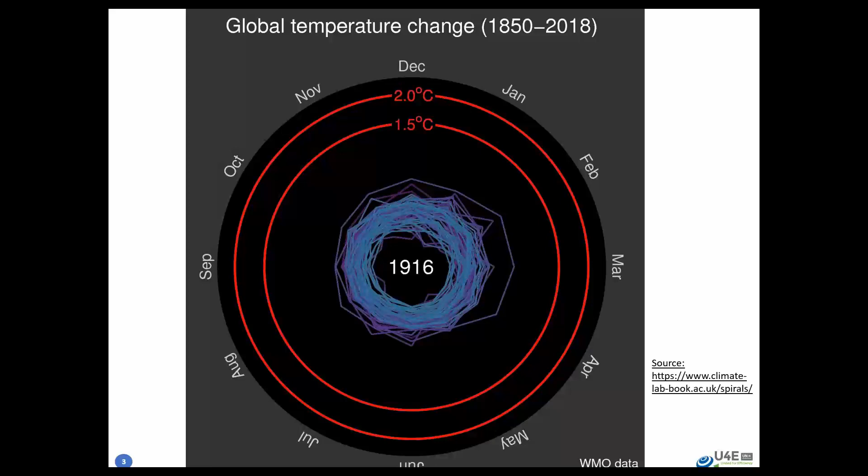So the context, as most folks are aware, is that we are living in a warming world. And not only is the world warming, but it's warming at an accelerating rate. The Earth has warmed approximately 1 degree Celsius since pre-industrial times. If warming continues at the present pace, global average temperatures could potentially reach 1.5 C above pre-industrial as soon as 2030, and even earlier if we take into account some of the accelerating warming, for example in the Arctic regions. This is why it's very important to identify where we have mitigation strategies that can be fast acting and where we have the tools to make them real.

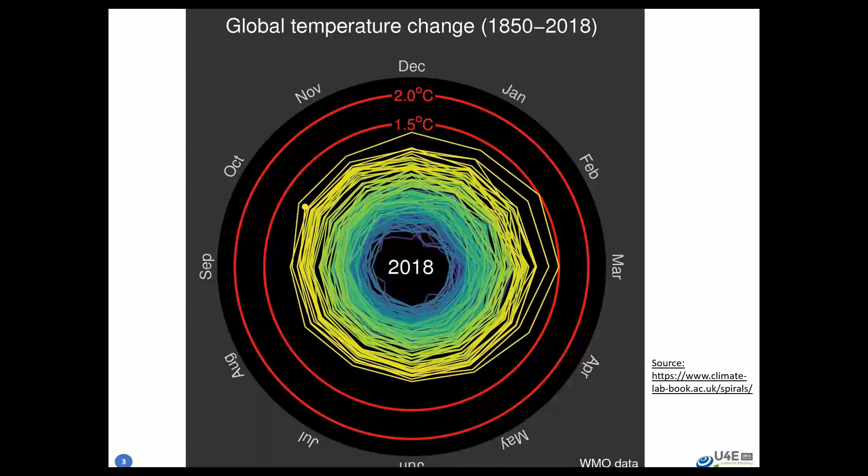Next slide, please. The good news is that we have the Montreal Protocol on substances that deplete the ozone layer, which since its agreement in '87 has avoided approximately as much radiative forcing to date as current forcing from CO2 — about 1.7 watts per meter squared.

Now, the Kigali Amendment, which was agreed in 2016 and went into effect in January of 2019, is estimated to avoid approximately 0.4 Celsius of warming by the 21st century. The Scientific Assessment Panel of the Montreal Protocol found that if we were also to improve the energy efficiency of cooling equipment, we could potentially double the climate emissions benefits from the HFC phase down in the near term.

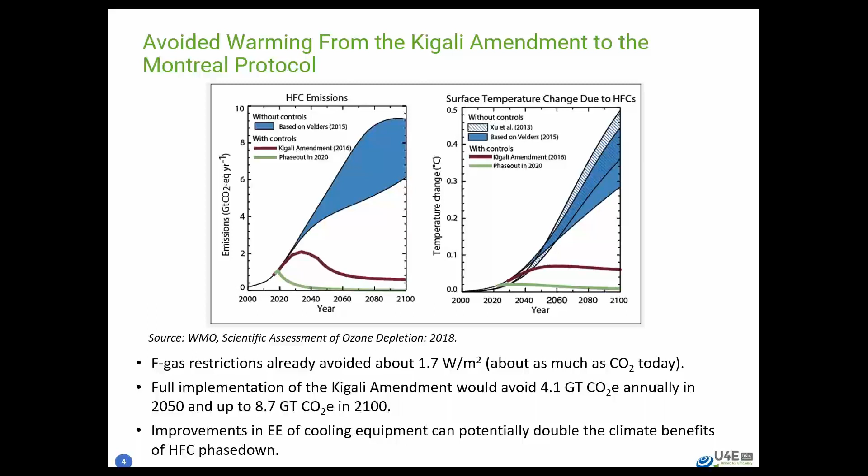An analysis recently completed by Lawrence Berkeley National Laboratory, for example, looking just at energy-related emissions, found that if we were to essentially replace stationary air conditioning and refrigeration with best available technologies today, we could avoid cumulative emissions of 150 to 280 gigatons of CO2 by 2060. So this is one of the largest mitigation sectors available to us. Next slide, please.

Just a quick word on the Kigali Cooling Efficiency Program. It's a philanthropic collaboration focused on promoting energy efficiency of cooling to increase and accelerate the climate and development benefits alongside the Kigali Amendment and the Montreal Protocol refrigerant transitions. The focus is on mitigation, but we also are concerned about health and equity through our access to cooling window.

And I encourage everyone to look up the Sustainable Energy for All cooling outlook that was just released earlier this month. So we built partnerships across the Montreal Protocol and energy efficiency spaces, including work with the Montreal Protocol institutions, and the work with UN Environment and U4E has been very important as we look to provide tools and knowledge to help with strengthening energy efficiency policies, standards, and programs.

Next slide, please. One of the things that has been very revealing as we've looked at the cooling sector, in particular the largest in terms of units, the Minisplit Market for air conditioners, is that there is a strong relationship between policies for efficiency and not only the level of efficiency of equipment, but also the refrigerants that are being used. So very bluntly, the absence of good efficiency policies is affecting markets and consumers directly.

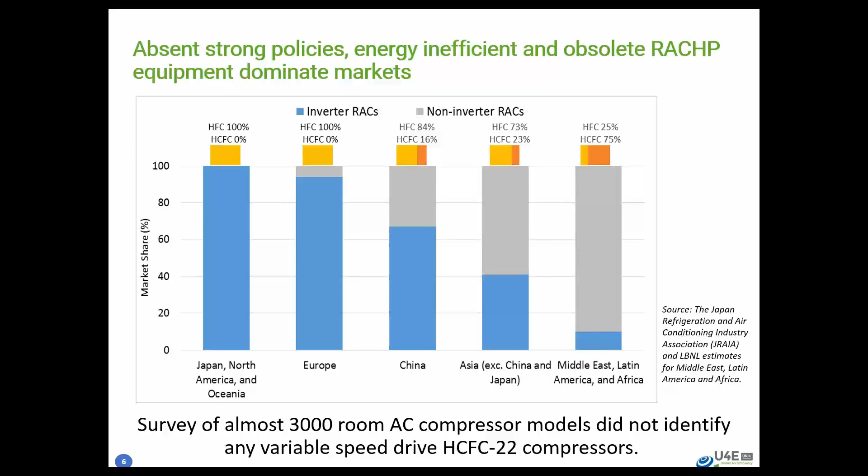One of the great aspects of the model regulations is that, in addition to minimum standards, they also have a high efficiency and middle tier to help countries see a trajectory of improvement for efficiency. Efficiency does not stand still. Innovation is constantly occurring, and we want to encourage, through complementary programs, adoption of these more efficient technologies to bring these products to market. You can see the increase in scale of savings with the high ambition scenario.

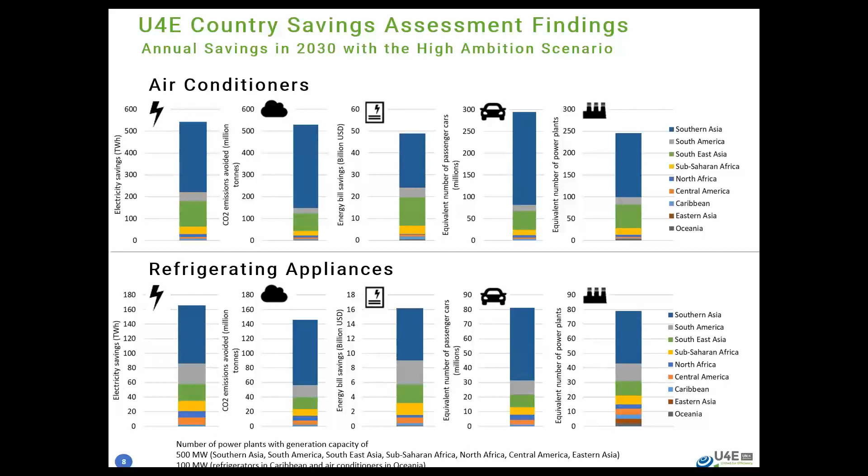So what I'd like to dive into again is a bit of how we got here. Why did we develop these model regulation guidelines in the first place? Where I'd like to start is that we had the honor and the privilege to co-host training workshops with essentially all of the world's developing and emerging economies over a 2-year period.

In 2018, and again in 2019, we held what we called a twinning workshop, a series of twinning workshops in different regions around the world. These brought together senior energy efficiency officials and ozone officers, people that work in environment ministries typically, and they are charged with compliance with the Montreal Protocol.

So for folks that aren't aware, as a bit more background, part of what we're trying to do here is bring together two different topics that are typically not addressed jointly. Energy efficiency is a big opportunity from a climate standpoint and economic development standpoint, and a lot of the energy ministry officials are familiar with setting energy policies and having energy programs. On the other hand, in the environment ministry, they're dealing with the refrigerant gases that are in air conditioners and refrigerators, and they are often working on these things without having the support or the engagement of energy officials.

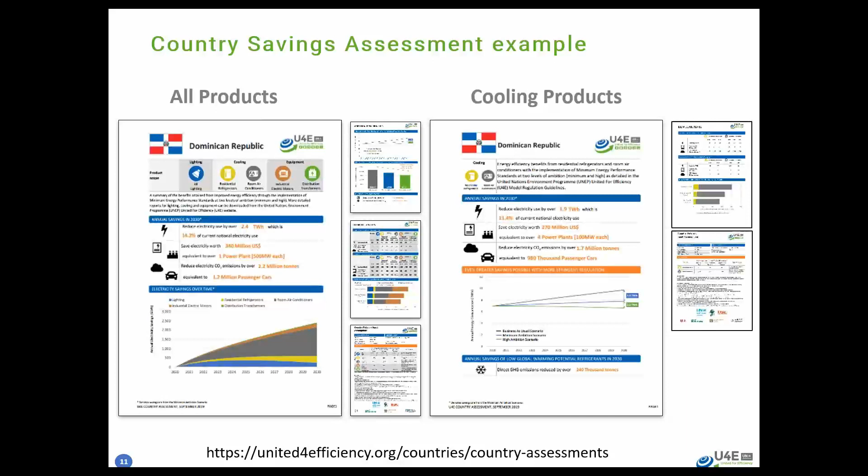And if you have questions or feedback on the analysis we've done, you can reach out to us and let us know. So now let's dive in.

For those who don't have much background—this may be familiar to attendees of the twinning workshops—this is a very simple overview of minimum energy performance standards. Let's say in a typical unregulated market, with no market monitoring system, there's a variety of refrigerating appliances available for sale today. It's clear that some are going to be worse performing, with worse energy efficiency than other models, but it's often tough for consumers to differentiate.

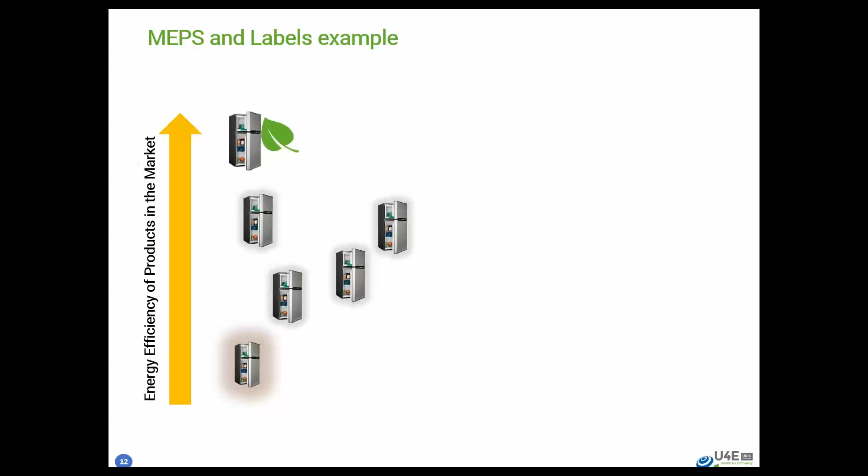Consumers might not know that buying a really inefficient product is going to cost them a lot of money on their utility bills. So one of the targets we're trying to make easier is to set a performance floor, a minimum energy performance standard, that would ban the importation of used products. It would also ban inefficient products from entering the market, and if you choose to regulate refrigerant gases simultaneously, it would also ban high global warming potential refrigerants.

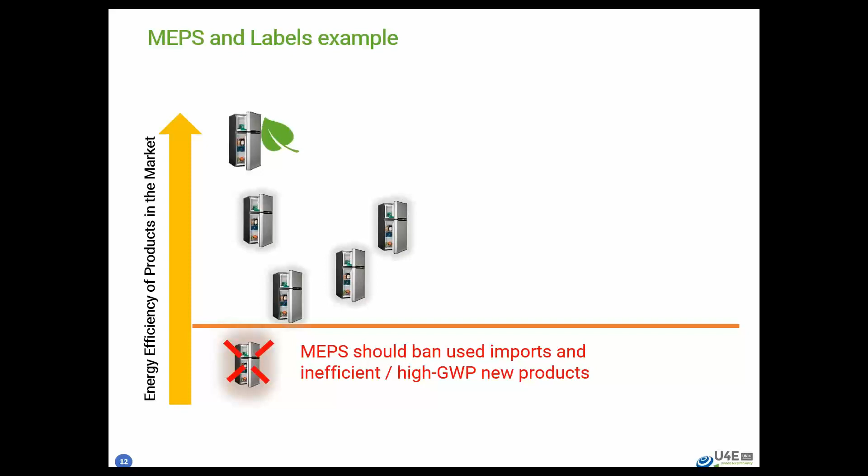For consumers to further understand the differences and performance between products, it's important to have labeling. This is a generic example—you can use stars, letters, various approaches to labeling—but it shows that governments will often try to incentivize the very best products, those A-level or top star products entering the market. Here we've got a little green leaf next to the best product, so the consumer can get a better sense of what's available for sale.

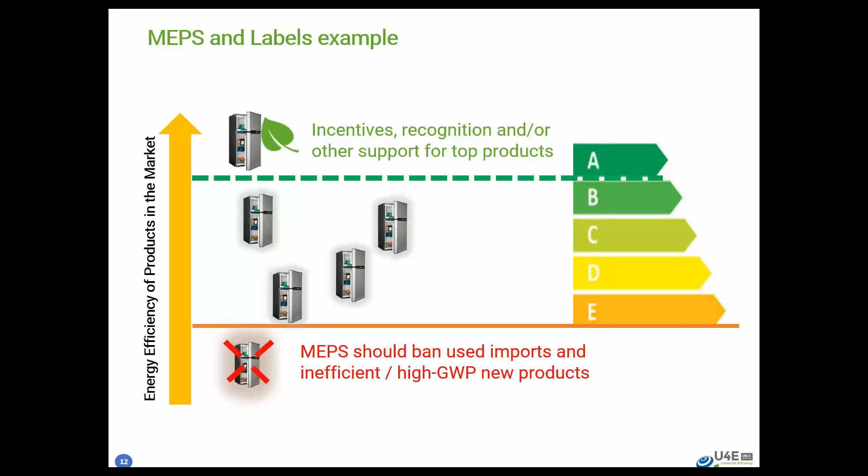So in a nutshell, this is MEPS and labeling. We're drawing the model regulation guidelines from some of the world's best examples. We didn't just sit three or four of us in a room and try to draft these things—we did a mapping to get a good sense of where policies are today around the world. We have a spreadsheet tracking all the policies we're aware of on refrigerating appliances and air conditioners, and we wanted to see where major markets are headed and where the technology is trending.

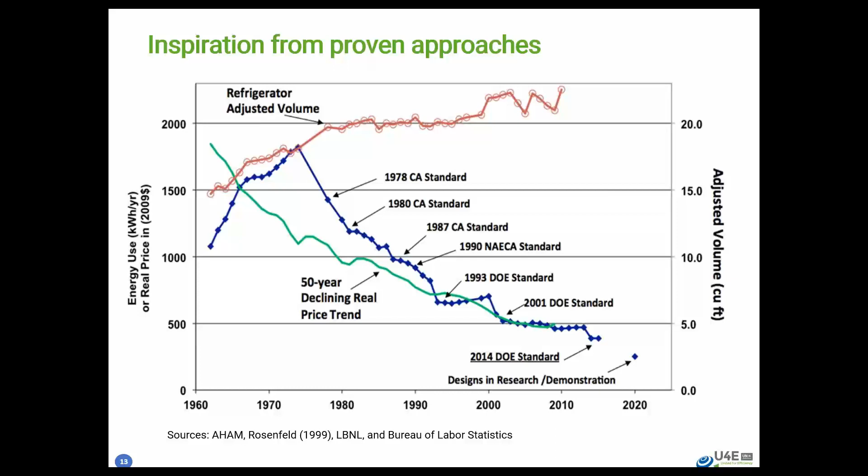So a country might say, well, we're banning the importation of used products, and yet they're finding over and over that used products are flooding into the marketplace. So enforcement's a challenge. Another big issue is that you can have neighboring countries that have completely different policies, so they're asking a manufacturer to do one type of test while the neighboring market requests a different type of test, and the cost of compliance is driven up.

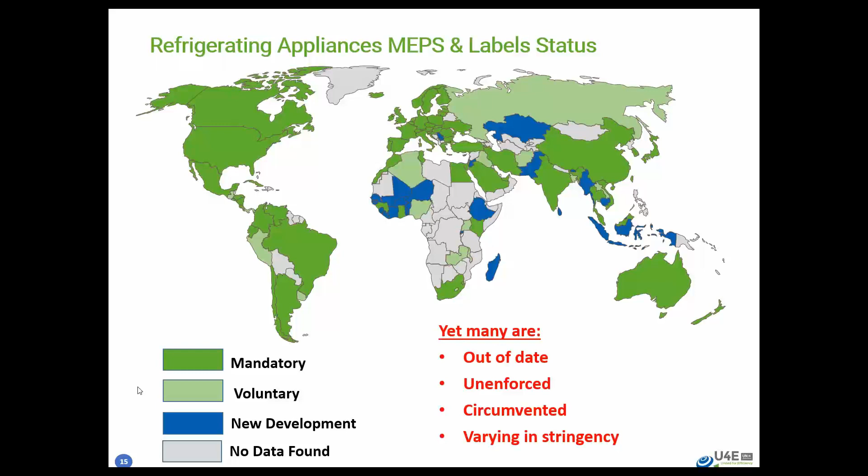So the aims of the model regulation guidelines, we really hope that these will make it a lot easier for countries that want to either adopt new or enhance existing MEPS and energy labels. We're encouraging countries to simultaneously address energy efficiency while transitioning to lower global warming potential refrigerants. You're obligated to do this under the Kigali Amendment, and it makes a lot more sense to address both of these opportunities simultaneously.

You can see some of the other benefits here. What we're hoping to do is drive more robust policies that are demanding greater energy efficiency, using more coherent and consistent requirements for labeling. We've got variations here, of course. Not every country is the same. Weather and climatic conditions vary, so the performance requirements need to vary accordingly. Where possible, we tried to streamline this and offer a consistent set of clear guidance, but we have differentiations on some of the core areas where it may be needed.

In terms of benefits, we've talked about this a bit already. We really think this can help drive innovation in markets where they've been lagging in terms of getting better performing products. In many cases, countries that have unregulated markets or outdated policies are dumping grounds for products that can't be sold in well-regulated economies. So one of the things we're hoping to do is drive innovation in developing and emerging economies in terms of the products offered for sale, to make them more affordable because they're tapping into economies of scale, the types of products being sold in bulk in countries that have robust MEPS and labels. And we're trying to make it a lot easier to harmonize requirements, reduce barriers to trade, and enable countries to better work together on monitoring and enforcing the rules.

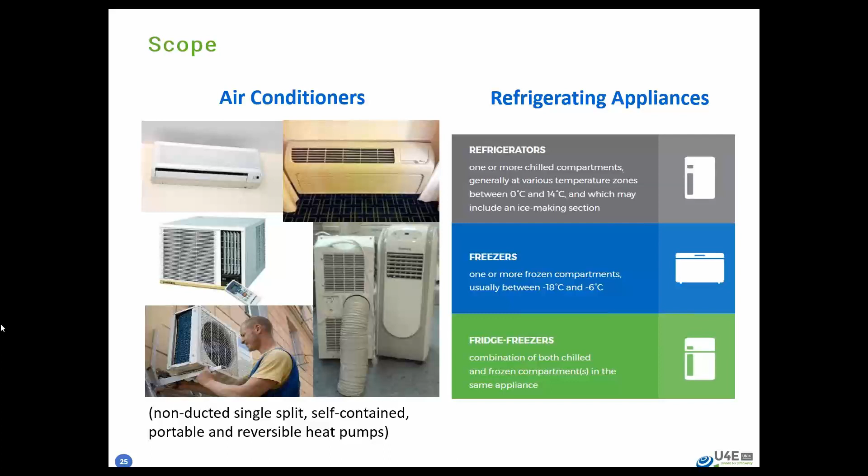We also ensured that these standards would be able to be adapted for different climate zones, and you'll see more detail on that further down the line. But in this slide... I'm sorry, go to the next slide, yeah.

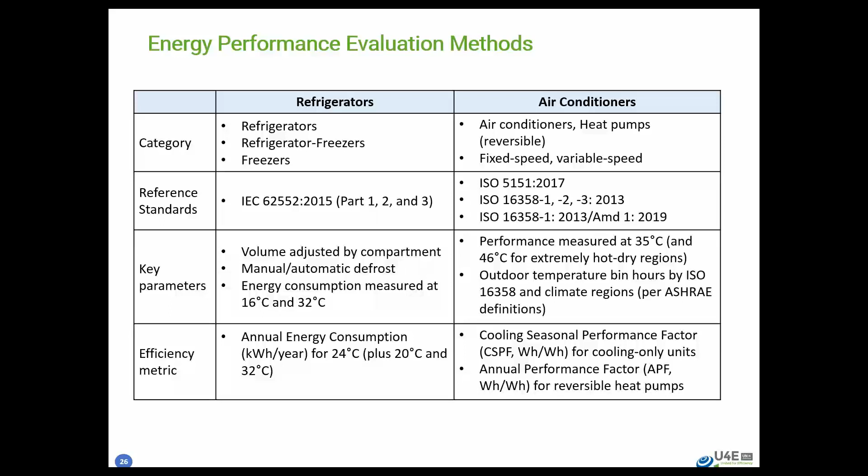So the minimum energy performance requirements that we looked at, both for fridges and air conditioners, we tried to ensure that the levels we considered would be applicable to most economies, and that air conditioners and refrigerators would be available at costs affordable for the majority of consumers.

Essentially, we tried to make sure that we were setting the regulations at a level either that these major economies were already at, or at a level that these major economies were heading toward, to ensure that we were banning the least efficient products, and also, as Gabby mentioned earlier...

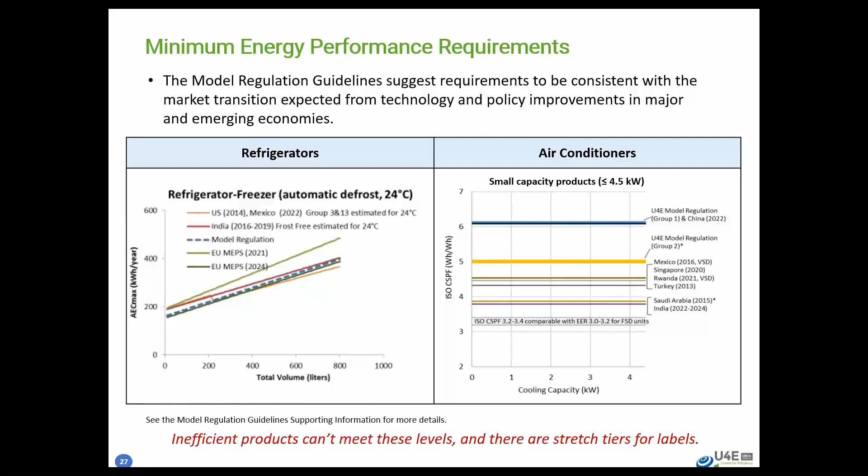In addition to being able to set minimum standards and labels, we also wanted to ensure that the same air conditioner or the same fridge would be labeled according to the climate zone or the weather experienced in that particular country. So as you see on the left, we have different levels, and we also have different temperature bins on the right for the different air conditioner climate zones. Again, we try to ensure that these regulations would be applicable as widely as possible.

And so these different groups that you see, group 1, 0A, 1A, those are all referring to the ASHRAE climate zones. The high efficiency levels represent approximately 30 to 60% of the efficiency improvement that's possible, but it's less than the best available technology. In other words, there's still room for further improvement even beyond the top level of the label, but we wanted to ensure that these levels are widely applicable. Next slide.

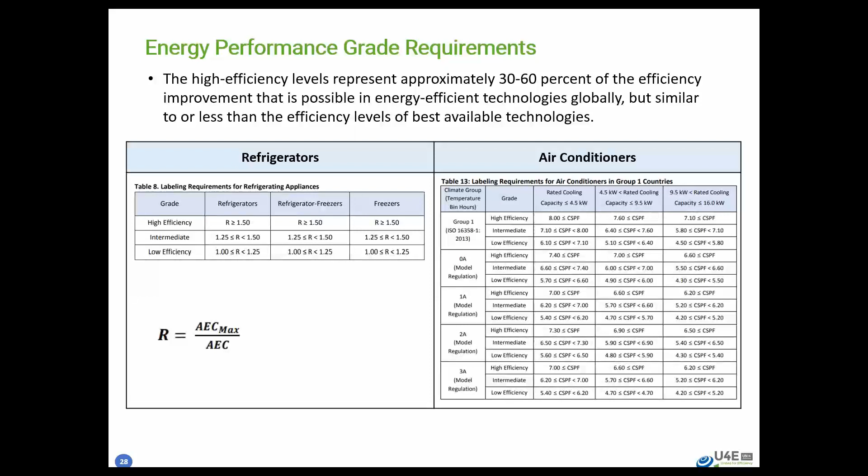So we also, in the model regulation guidelines, have put forth several refrigerant and foam blowing agent requirements. For getting into the numerical values, it's important to state that the applicable standards or regulations put forth should indicate compliance of products sold with relevant refrigerant designation and safety requirement standards. Those include ISO 817 for refrigerant designation and ISO 5149 for safety, among others.

So we are providing some figures of where major markets are going for refrigerants and foam blowing agents, both related to their ozone depletion potential, or ODP, and global warming potential, GWP, the latter over a 100-year time horizon. For refrigerators, the ODP should be 0 and the GWP should be 20 or less. This reflects the widespread global adoption of alternatives to CFCs and HFCs that have very low GWP. For air conditioners, the ODP should also be 0, and the GWP for split systems should be less than 750, and for self-contained systems, that should be less than 150.

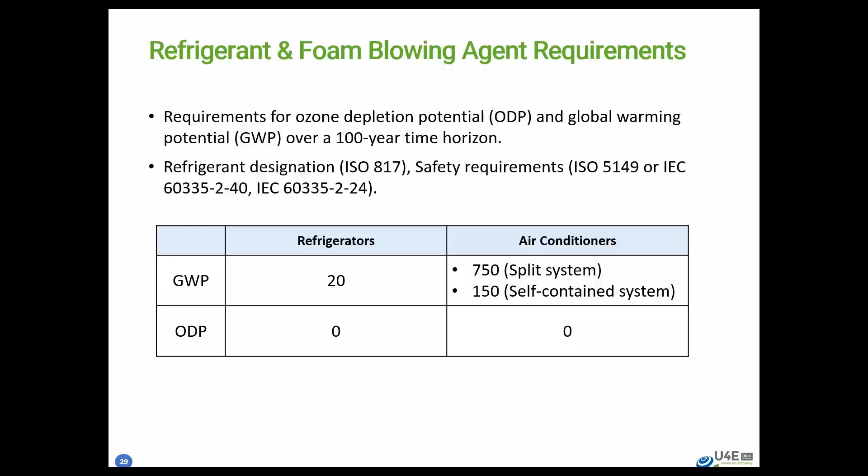So we also are suggesting in the document that some important product information be made clear for the consumer and for those acting on behalf of the regulator to assess what the energy performance and refrigerant related performance of products sold are. They're similar for refrigerators and air conditioners, but I'll go through them quickly for air conditioners. That should include model name, serial number, what type of unit it is, because the requirements may differ, country where the product was manufactured, the rated cooling and heating capacity, the maximum rated power consumption, the rated performance grade, that is to say, is it 1-star, 2, or 3, or however that is formulated in the regulation that implements it, and the rated energy efficiency level, the specific performance level, yearly electricity consumption in kilowatt hours.

And again, the refrigerant designation and certified safety standard, that should include ODP and GWP. We think it's important for these products to bear these on labeling, again, to facilitate checking for compliance. Next slide, please.

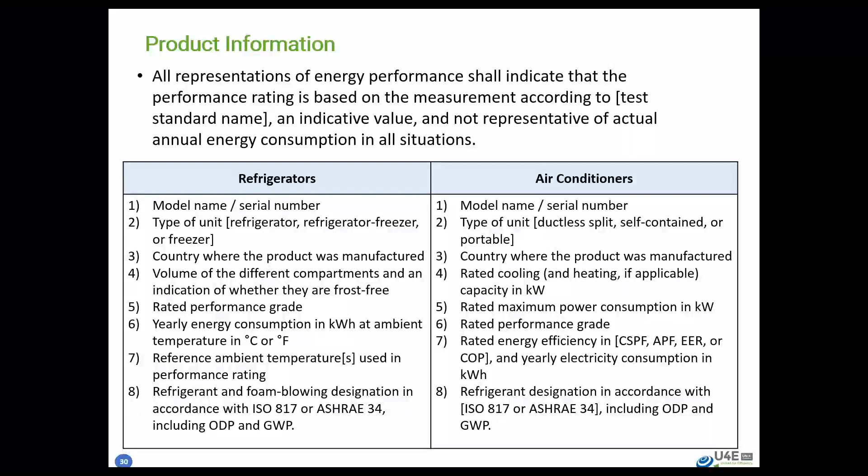As I mentioned earlier, we try to look at many different markets to ensure the availability and the cost of these appliances would not be prohibitive for most of the economies. So for air conditioners, we looked at many different markets, including China, India, Indonesia, and Brazil, as well as the Caribbean, to see where the markets are today.

One point to note is that since we expect these regulations to be adopted in a couple of years from now, as Brian mentioned, these models are likely to be replaced by models that are even more efficient. So these circles you see here are going to head further upward, above the model regulation line, meaning you'll see more models on the market over time that meet these guidelines. But already on most of these major markets, there are many air conditioners, and as you'll see on further slides, many refrigerators available that meet the model regulation guides.

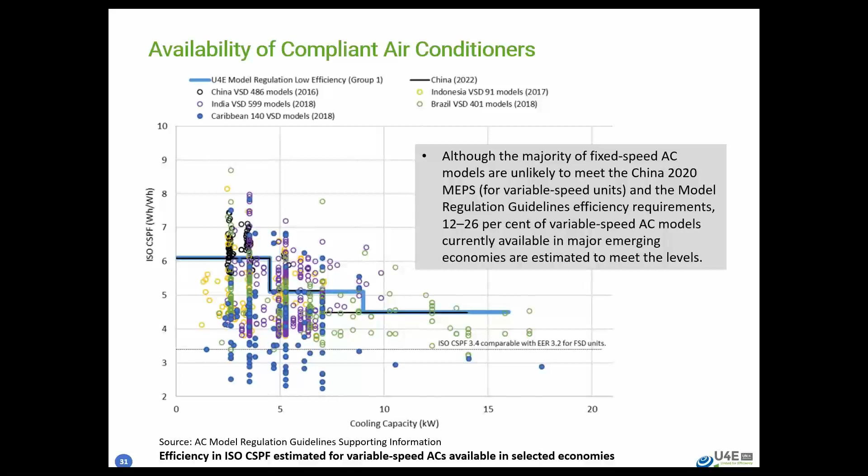Here you see the top level of the air conditioner model regulations, and the thick blue line. Even for the top level, we try to ensure there are air conditioners available, and in the next slides you'll see refrigerators available, that today meet the best available technology against the model regulation guidelines. But we also try to ensure these are not too low, so there's some relationship between the regulation tier 1 levels and the best available technology in any particular market. When you see the acronym BAT, that refers to the best available technology on that particular market, and the best available technologies are about 30% higher than the model regulation levels on those markets.

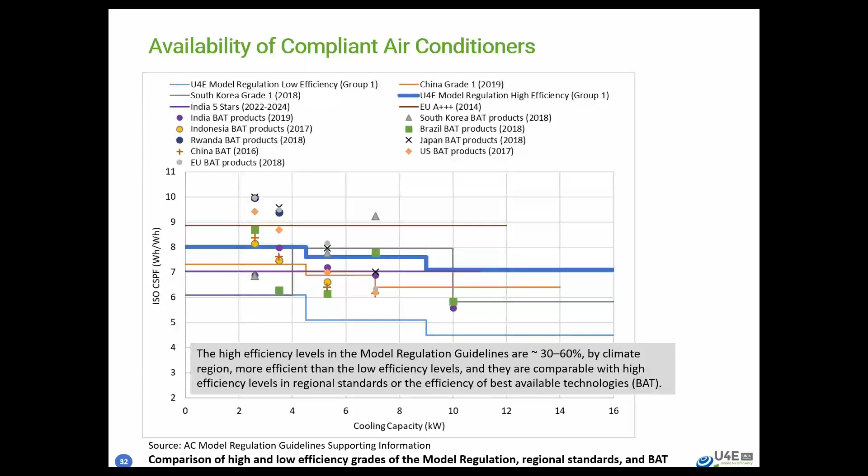For fridges, you have to look at it somewhat in reverse, in the sense that models below the lines are the ones allowed on the market. For example, the red line refers to India's 2017 requirements, and you'll see the model regulation, both the minimum level and the high level. There are some models that already meet the requirements of the model regulations, and even for the high level, the model regulation levels are set at a level where you have refrigerators available on the Indian market, and we think globally as well, that meet those levels.

So we try to ensure we're harmonizing where the major markets are going, in order to ensure countries will be able to avail of the economies of scale from those markets, because as more appliances are made in India and China and other places, the prices of these appliances fall. We try to ensure those benefits are captured and available for the major economies.

If I can just add to that briefly - one of the things we've been trying to do at United for Efficiency, we work with about 40 countries around the world on market transformation projects. If a country were only to look at a market assessment of its local economy, and let's say they hadn't met some labels or they're pretty out of date, they may look at what's included in the model regulation guidelines and be worried they don't have products today that could meet these levels. So what we're trying to point out is the vast scale, the number of these products already being sold in other markets that have more strict regulations.

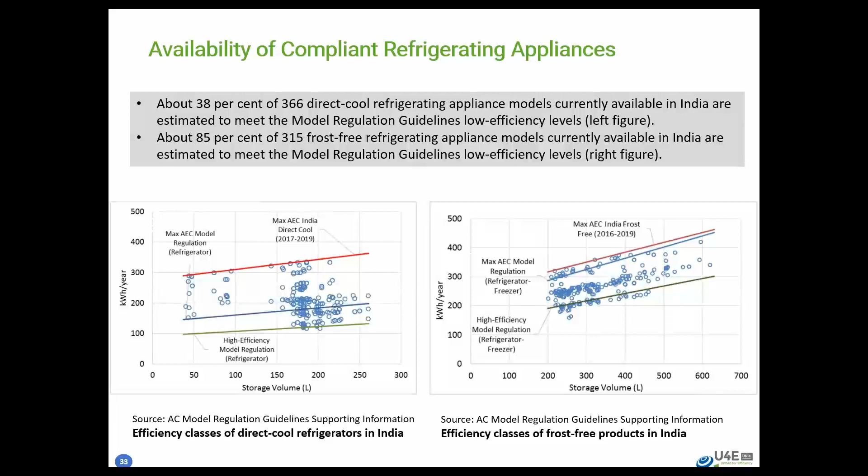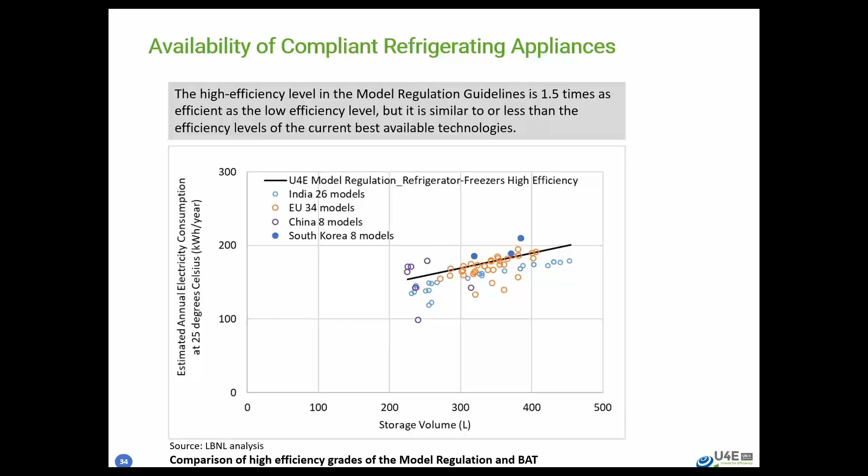There is also growing availability of appliances using lower global warming potential alternatives. For air conditioning units, about 84 million units using R32, which has a GWP of about 677, have been sold as of this past spring. We also know that Godrej in India has sold at least 600,000 R290 air conditioners with very low GWP in India and South Asia. Refrigerators have long since transitioned in much of the world to using R600A, also very low GWP, and the flammability issues with it have been fully addressed.

So we are encouraged by these figures. Even with split air conditioning, while something with GWP 677 may not be the final alternative selected in a market, it's much better than R22 or HFC R410A, which are essentially the default alternatives under consideration. The large market for these products should facilitate not easy, but easier availability of compliant products.